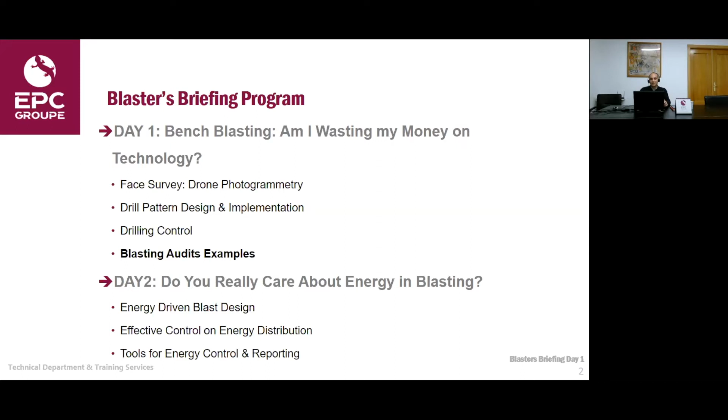So today we'll focus on the basis of good blasting, which is basically controlling the geometry of the face. We'll be having a look at the state of the art of face survey, of drilling control, and we'll be giving a couple of examples of audits that we have been doing in the last years that give a good example of cost savings, cost optimization by the only implementation of technology in bench blasting. Okay, so here we go.

All of you know that drilling and blasting is the first step in the production chain for mineral production, in quarry, in mining, and it has a big influence on what is happening afterwards. So a good quality in drilling and blasting is going to affect dramatically what is happening in charging, in hauling, and in crushing and milling.

If I would ask you to give me a list of problems that commonly appear when bench blasting, I think we will all get to something like this. We can have fly rocks, which are probably the most dangerous event that we can have in bench blasting. Misfires, toes left after the shot, unstable faces that we have to deal with after that, unsuitable muck pile, a muck pile that has not the right shape for our loading machine, so it's too tight, too rough to excavate.

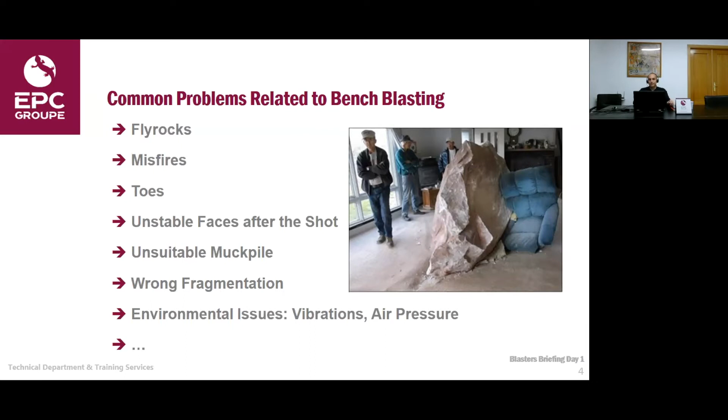The wrong fragmentation for our purpose, so it means usually too coarse, too big fragmentation, but sometimes too fine. And also environmental issues that can be a big problem for those mineral operations near populated areas. These environmental issues can force some mines or quarries even to close down, depending on their location. So big issues.

These technical problems have safety and economic consequences. All those problems will be translated into safety and environmental issues that we have seen, vibrations, etc. But they can also be translated into a reduced productivity in the plant in tons per hour, which means that the plant will not be running at a good speed of production. But it can also be translated into costs in energy for the crushing, costs in secondary breaking or secondary blasting for dealing with boulders and toes.

It has been proved many times that a wrong fragmentation, a too big fragmentation, will have influence in cost for charging and hauling. But we can also have other sorts of problems like mineral reserves loss. For instance, if we are producing too many fines in certain operations, those fines can be a big problem. We can be putting all that percentage of fines either as an undervalued product or as something that we have to put into the bin, that we have to discard.

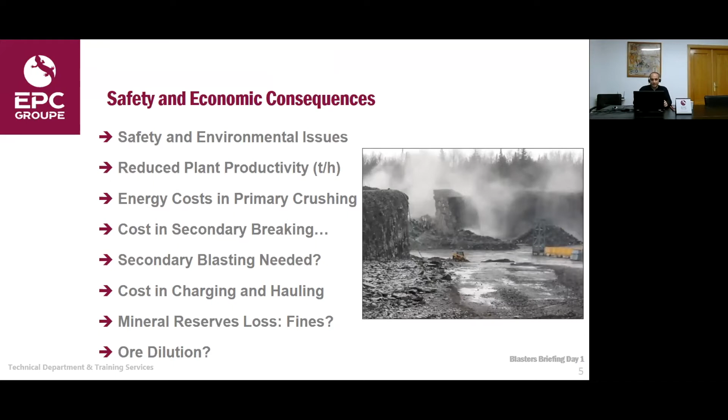Part of that is explained by the mine-to-mill concept, which says that by increasing your costs in drilling and blasting, which means by drilling more and using more explosives, basically by doing a better use of explosives, by fragmenting more the rock with the chemical energy of explosives, you will be able to reduce your costs downstream in loading, hauling and crushing, and somewhere we will find a minimum in the cost, and that's the minimum that we have to look for. I do agree with this graph, because the chemical energy of explosives is the cheapest by far.

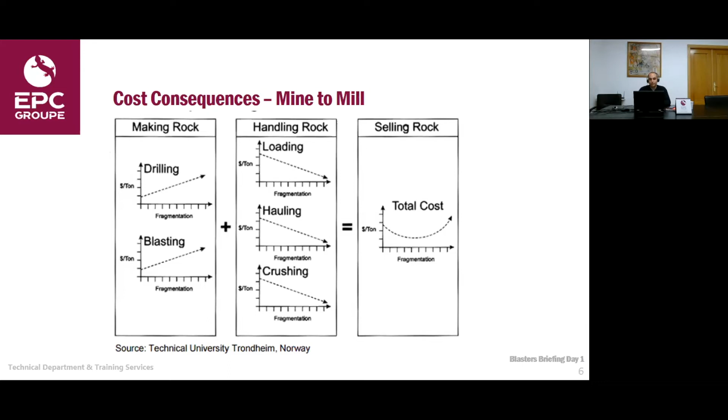However, we have to consider that sometimes we do not have to increase our costs in drilling and blasting to find that minimum. Sometimes we only have to do things better. Very often, by making use of technology, we get to a point where we can make a better use of our explosives, of our drilling. It's not necessarily that we have to spend more in drilling and blasting to get a better costing on our production, and that's what we are going to see today. So the EPC way, we are focused entirely on technology for drilling and blasting, both in underground and in open pit and quarrying.

So we go quickly to this cycle of technology use. We start with a drone survey. We use a drone for surveying the face, and from that, with photogrammetry, we get a 3D model of the face. We'll see that later on. Using that model, we can design an optimized drilling plan for our purpose, for the fragmentation and heave that we want on the muck pile. That design is transferred to a drill rig, usually fitted with a GPS system, so it will locate precisely on the collars. And very important, we need to control the deviation, as we'll see later.

Once we have the collar positions, the real trajectory or deviation of the boreholes, and the 3D model of the face, we are in a position to design the loading plan and the sequencing plan. We do that with our software, the Expertise 3D, same as for the drilling plan. We will produce a plan that, as we will see today and on the next webinar as well, will aim for an even distribution of energy within the rock mass. That plan is then uploaded to the field tablet, and this field tablet communicates via Wi-Fi with the MEMU, the mobile manufacturing unit, if we are going to be loading with a MEMU.

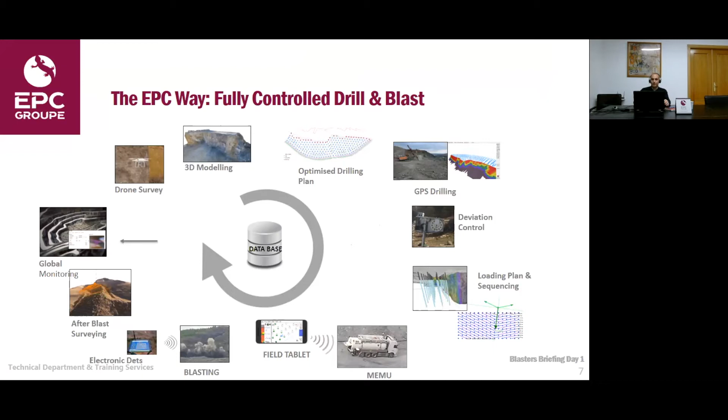Well, this is a short summary of what we can do and what we do. But today we're going to focus on the geometrical control of all of this cycle, which is the drone survey, drilling plan, drilling control, and what we can obtain from that. So let's start with it. The face geometry. This is the basis for everything. Knowing the precise geometry of the face is the keystone for any other job that we want to do with our blasting.

Traditionally, the bench has been considered as this, a linear model. Everything is straight, everything is parallel, perfect. And this sort of linear model has always been used for calculating the blast ratio, the amount of explosives, etc., and the amount of rock that we are going to blast. All that is like the Bible for our costing afterwards. However, as we'll see, this differs quite a lot from reality.

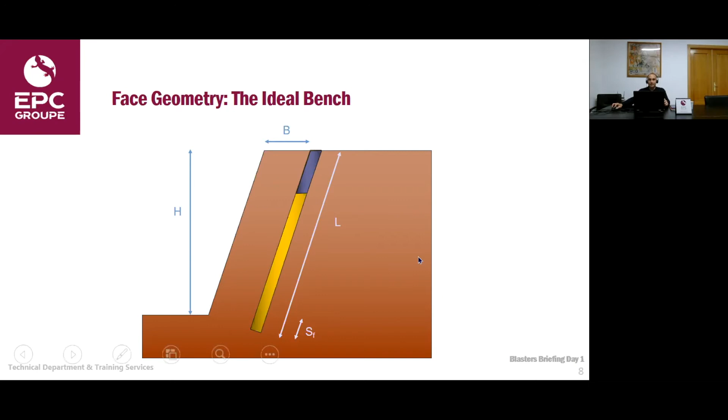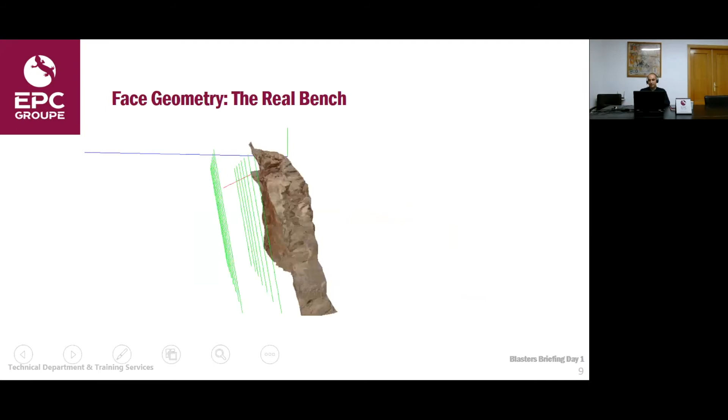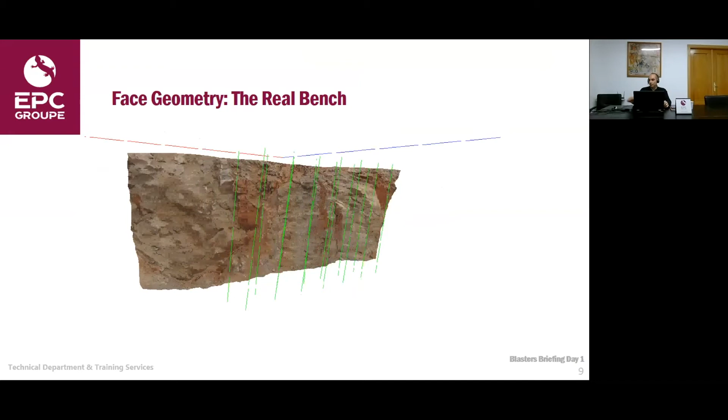The reality is more like this. This is a model obtained by photogrammetry of a bench and of a face to blast. And well, to be honest, it's not too bad. I have seen them much worse than this. But as you can see, nothing is linear there. You have plenty of irregularities on the face, which gives us an idea that reality is never close to the ideal.

What do people usually do to estimate things like bench height, shape of the face? Well, still many people use nothing. I mean, they just take a look at the face, and they say, well, I think my face is 15 meters high, or it's 12 meters high there and 13 there, etc. Sometimes they make use of a tape, or a stick together with a tape, to make some estimations of the bench height, of the burden at the bottom of the holes, etc.

But this is not good enough. It's very, very easy to get errors of more than 1 meter, if not 2, or even more, in the bench height or in the burdens. And that can lead, as we will see later, to cost increases and also to safety issues. So not good enough.

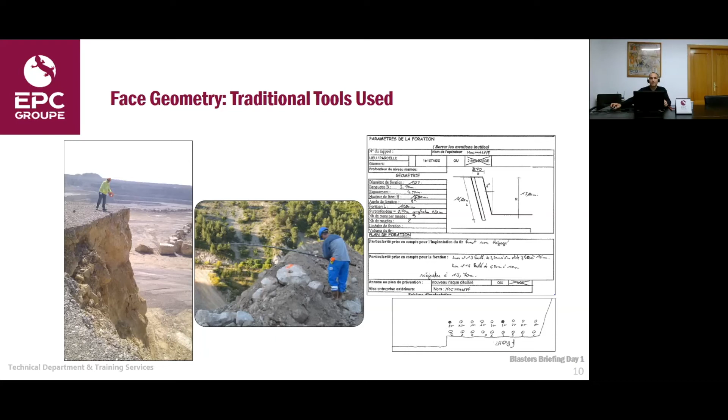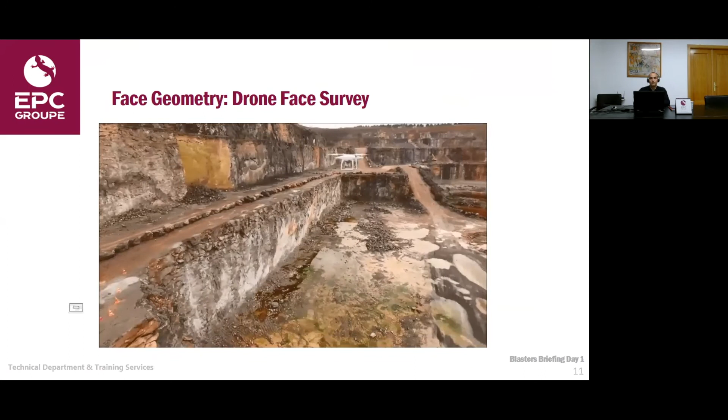What do we do now? What do we have? The state of the art now is this device. It's a drone. In the last 2 decades, we have had access to other devices, the lasers. First, we had the 2D laser, in 2 dimensions, that had to be operated manually. Not good enough in precision, but good enough to give us some idea of the burdens in front of every borehole. Then we had the 3D lasers that produced a decent model of the face, good enough to start doing designs. However, in the last 5 years or so, we have had access to these drones that produce a model by photogrammetry.

So they take pictures of the face, and they produce a drone survey from the photographs. Another advantage of this system is it's easy to use, very quick to deploy, and very safe to use as well, because they can be operated from anywhere. I mean, you have to have it in your vision range. But as you have seen before in the films, the pilot is in a very safe position, having a look at the pictures taken by the drone.

And on top of that, it's also very precise. You can see the guy there, that's the pilot, and it's very precise. As I was saying, we have been carrying out some tests on precision of these devices, and they are more precise than laser 3Ds. So very good, all advantages. And this is a tool that we use at EPC now for every survey.

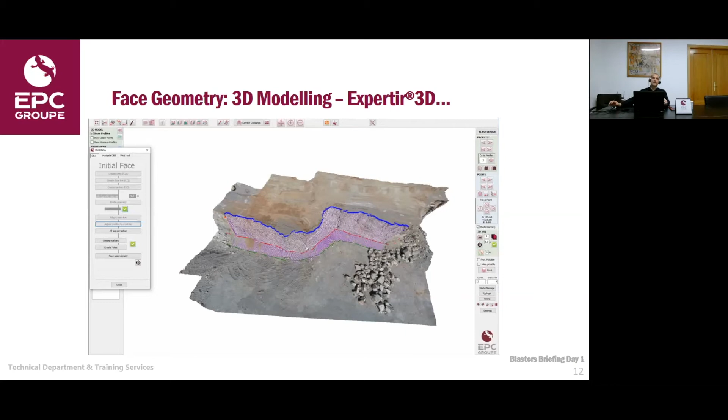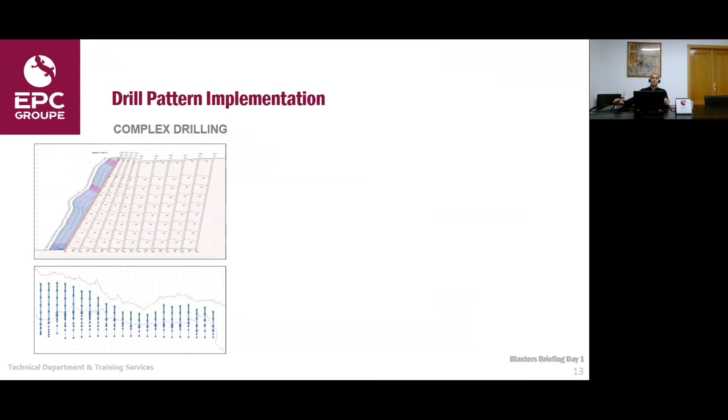So once we have that model, and with Expertir 3D again, we can start producing drilling patterns. Sometimes these patterns can be complex, especially when we are dealing with multiple rows and with inclined faces. What do we do here? Expertir 3D will give us the collar positions for a perfect drilling pattern. The right way to transfer those collar positions to the field will be to use a GPS device.

Either a manual GPS device, those poles that you can hold yourself, or even better, use drill rigs fitted with a GPS device in the mast. As you can see, that's one of our drill rigs in the UK, fitted with that device. That will ensure that the drill rig will be collaring in the right position all the time. So we have to drill that.

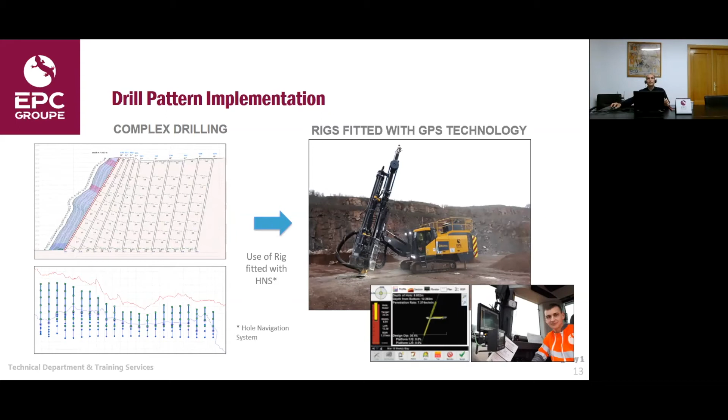That will take some time, and once it's drilled, very important, we need to control what we have drilled, because as you all may know, it's very common to have deviations, depending on ground conditions, on the type of machine that you are using, etc. It won't be unusual to have sometimes big deviations from the planned drilling. So marking and collaring errors should not be a problem if we are using a GPS device. Maybe we may have a few centimeters, because the drill rig cannot collar in the right position. Sometimes it has to move a little bit more, but very little.

However, depending on ground conditions and the machine, we can have deflection errors, what we usually call deviation. And also the mast might not be set properly. So we could have inclination errors in any direction, in azimuth or in inclination, or hole depth errors as well. So that's something we have to control, right?

As an example, you can see here on the right side of the slide a front view of a drill plan, and you can see how some boreholes tend to coincide, creating potentially a risk of fly rock at the bottom. But more than that, it is creating a potential of boulders and toes left in those boreholes that are separated by nearly 6 meters. So we may have problems here. So all that needs to be controlled before producing a right blasting plan.

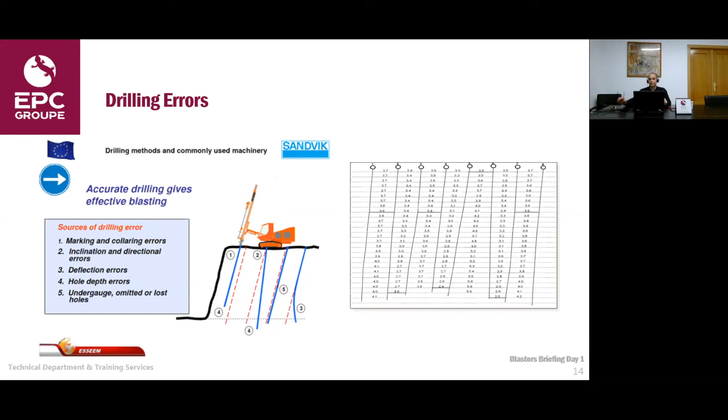How do we control this? Well, you may have seen this before. I'm sure you have. We do this by using an electronic probe. The one on the left is the one traditionally used, still being used. It's a pulsar probe that is put into the borehole, and every meter it takes the measure of the inclination of the borehole. So afterwards, it reproduces the real direction, the real trajectory of the hole.

However, we have been developing this for the last year. This is an automatic and user-friendly electronic probe by EPC that operates by itself and transfers the data automatically to the tablet in the operator's hand. So lighter, easier to operate, and quicker. Both give a very good result, and they are basic for obtaining a safe, productive design.

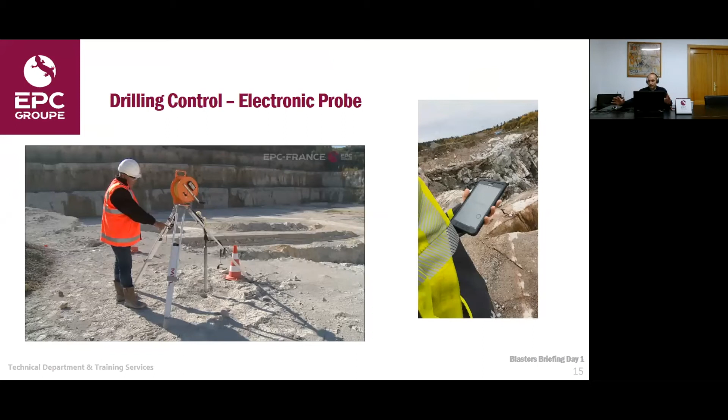So once we have all that, we can say that we have control on geometry. Otherwise, as I like to say, if we do not control geometry, we will always have uncontrolled blasting. No geometry control means uncontrolled blasting all the time.

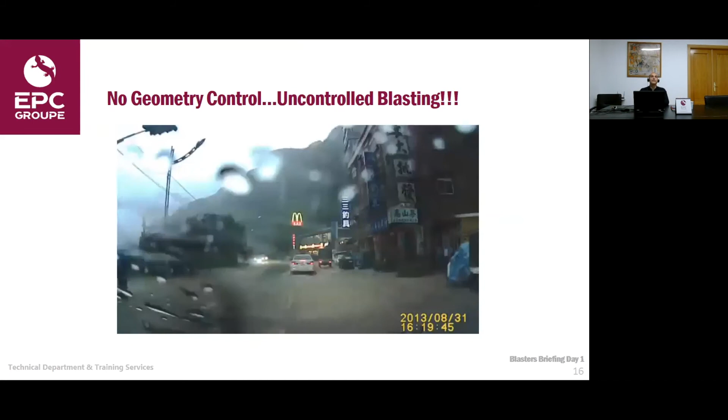The most dangerous issue we can have is fly rock. You will see here a tremendous real example of fly rock.

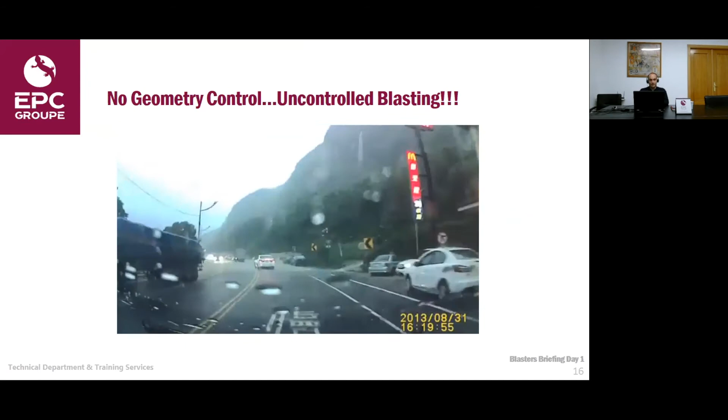Just a dramatic example of how things can go wrong.

Anyway, we won't be having this because hopefully we will be using technology for controlling our geometry, and on top of that, we will be stopping traffic when blasting near a road. So anyway, let's move on.

We are going to present now two examples of use of geometry, of use of technology in real cases, and how this use of geometry led to savings in our customer sites.

The first one is in an open pit mine. Our technical services went there and did an audit on the drilling and the design, basically the geometry of the faces to blast, and they found this.

They found that the boreholes near the free face were having to deal with burdens in excess of 10 meters very, very often - 10, 11, 12 meters. The others in the back rows were dealing with burdens more logical for the drilling diameter - 3.5, 4 meters.

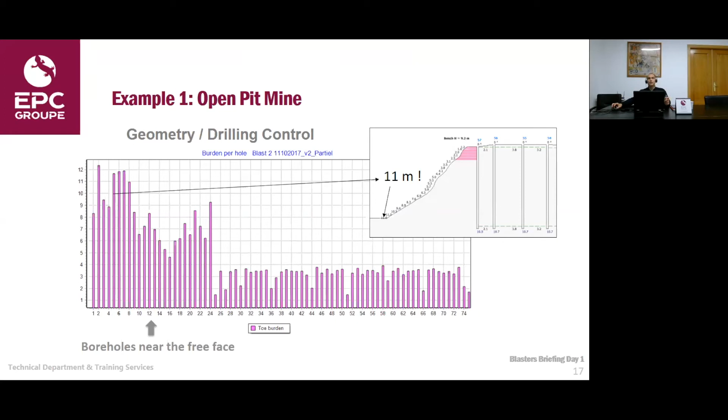However, what does this mean? Basically, it means this, as you can see - this is the blast filmed after that was the design, and this is the blast film.

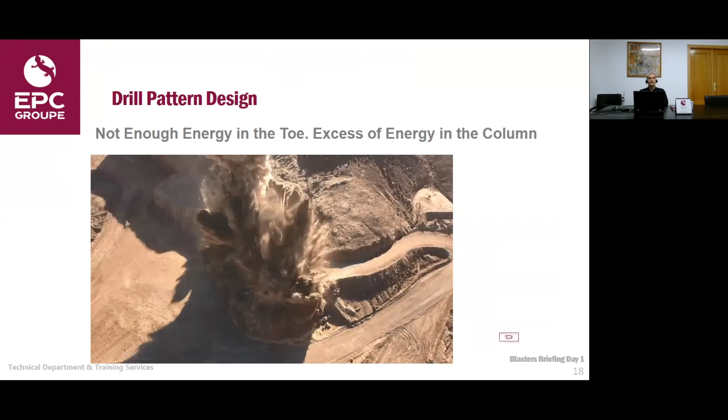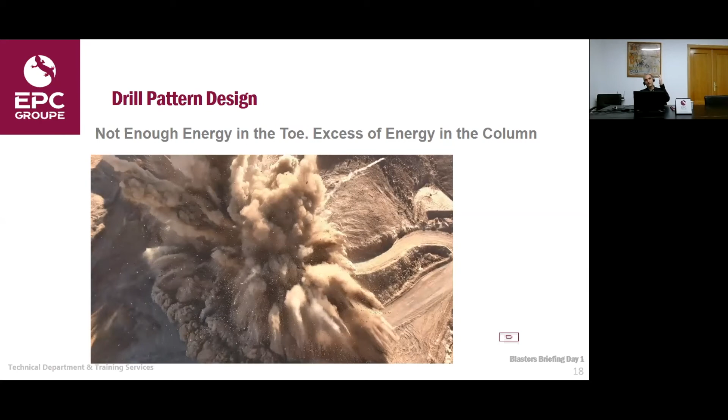The explosives always tend to work towards the easiest possible way. In this case, the easiest possible way for the front row is upwards, because they have to deal with 11 meters or more. So we're having fly rocks upwards, and as we will see later...

The problems mentioned before - boulders, toes left after the blast, etc. - economically means that we have to spend time, money, energy, fuel, and people in secondary breaking, in secondary blasting sometimes. So it's not good. All this can be resolved by doing things properly from the start.

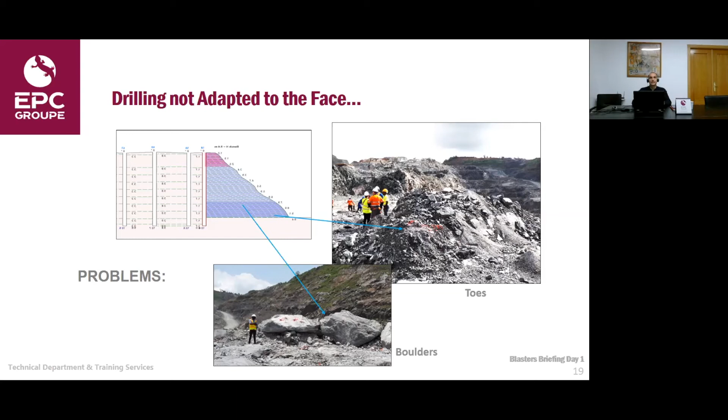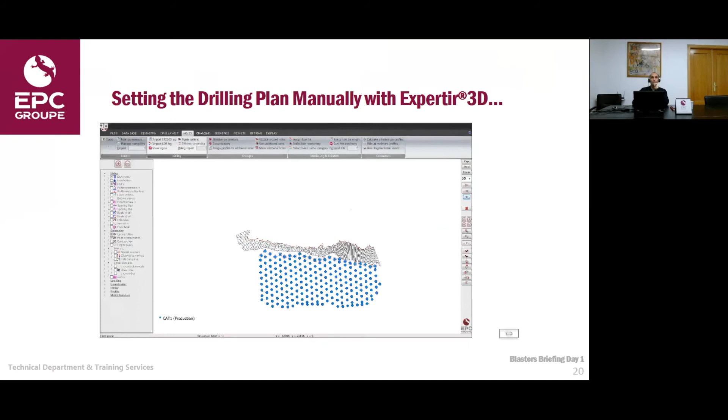So what do we do? Basically, we are going to adapt the drilling plan. Just as you saw before, all the boreholes were vertical, and that first vertical drilling - we always recommend to incline boreholes for a better work in the toe.

But anyway, when you have a face like that, so inclined, you need to adapt your front row, your rows behind as well, and that's what we are doing here. That can be done manually with Expertir here, but it takes time. Imagine that you have to deal with 300 or 400 boreholes, which is not uncommon in mining - it can take some time.

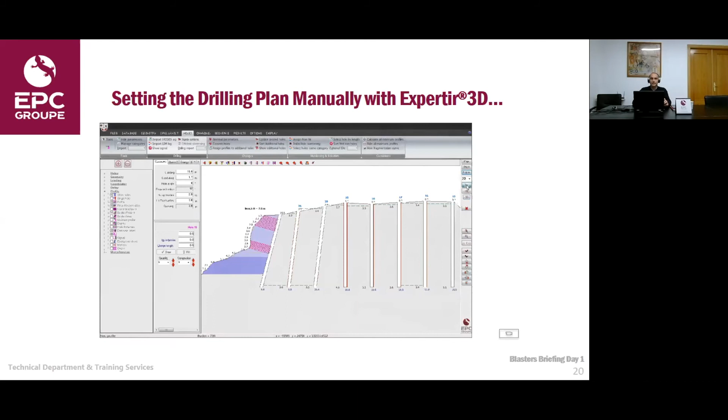So what do we do? Well, we have algorithms included in Expertir 3D. So the software can calculate for you automatically the drilling plan once you give it the basic data - the depth, inclination, the burden, spacing, and so on.

That will produce automatically a blast drilling pattern. Then you will have to probably make some corrections manually because algorithms are smart, but they are not perfect. But anyway, that saves a lot of time, and it will produce a drilling pattern according to what we want. You may have to do some corrections, but very little compared to what we were doing before.

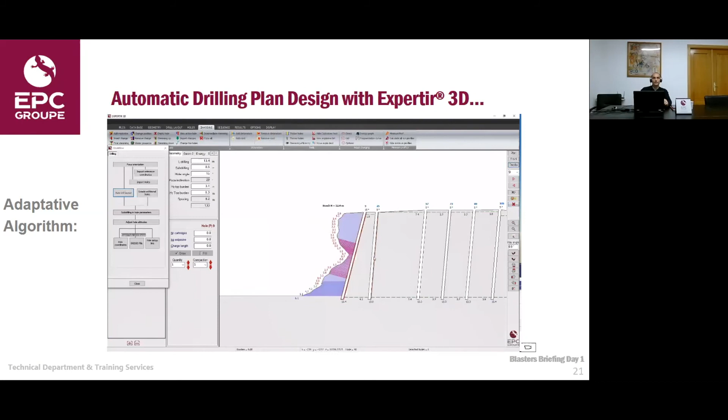So let's move on. So that was the starting point, the standard pattern, and as you can see, many boreholes were having to deal with burdens of more than 11 meters.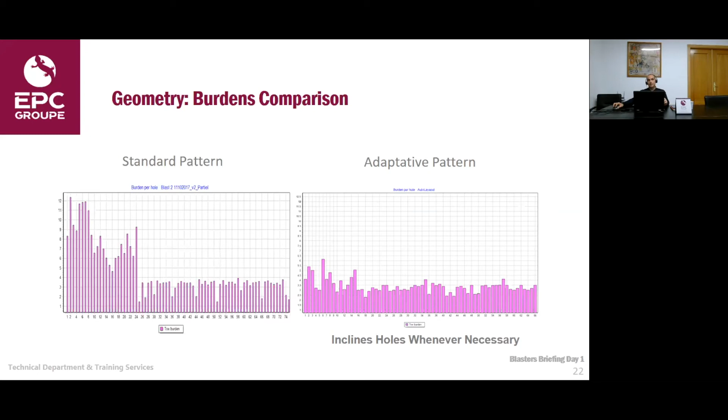Now we are able to produce patterns much more logical, and this means a more even distribution of energy within the rock mass that we are going to blast. When we produce designs that aim for this, that look for this, that are searching for a more even distribution of energy, we get results like that.

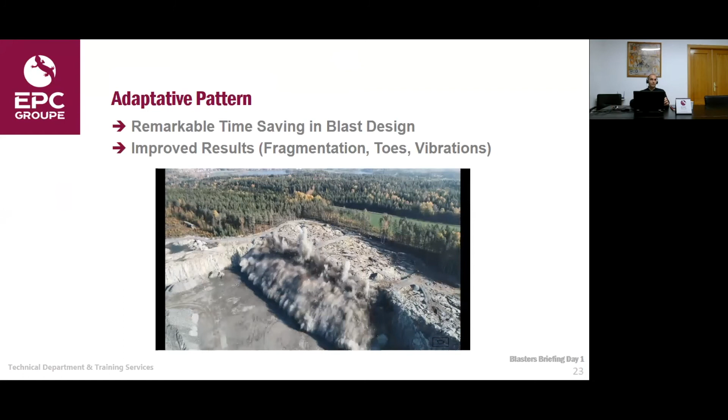We not only save time by using the algorithm in the Expertir 3D, but more importantly, we get improved results in terms of safety, but also in production parameters, like fragmentation, toes, vibrations, etc. So as you can imagine, having those results has nothing to do with having big boulders and

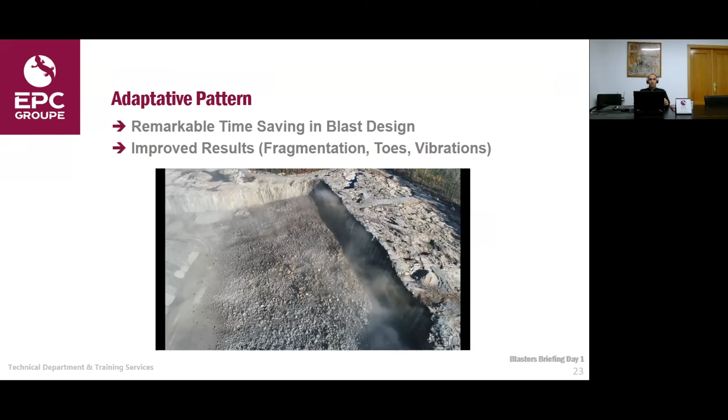toes left after the shot, etc. Well, that was the first example. We're going to move to the second one, which is in quarrying. That audit took place in a group of quarries in Europe, and basically they were not using technology. They were estimating the volumes blasted using the famous linear model.

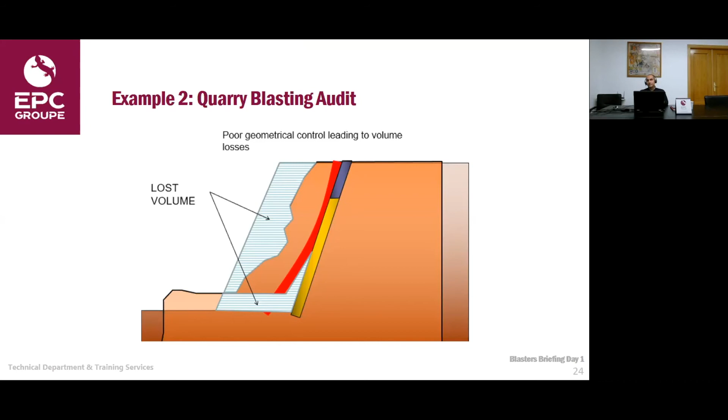And as we will see here in this graph, we audited 8 quarries, and 5 out of 8 were overestimating the volumes by an average of 20%, which means that they were using explosives and drilling for blasting 20% more than what they were really blasting. So this very simple, it means that they were increasing their costs by 20%, as simple as that.

What does it mean? Well, it means that the sole implementation of technology, of knowing precisely the shape of your face and the exact position of your holes, in this case, saved 20% of costs like that. In one go.

I could say easily that, because I have some experience now in visiting quarries in different places. Wherever I go, this problem is pretty common. So I won't be very surprised to see something like that in many other quarries elsewhere. These things happen very often.

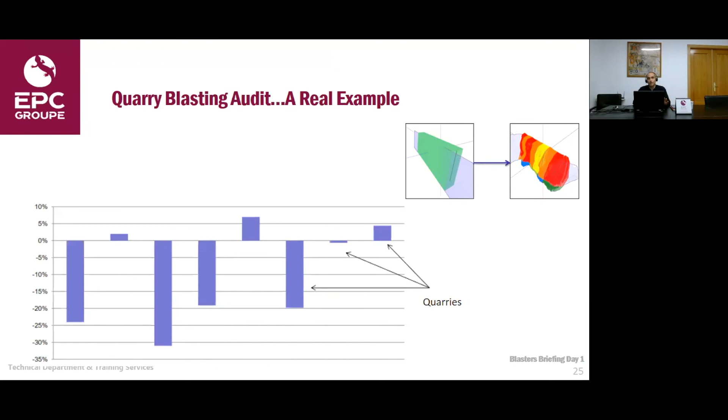You can see out of these 8 quarries, there were 3 quarries that were having the opposite problem. They were underestimating the volume. So someone could say, well, good for them, they were blasting more volumes with the same explosives, with the same drilling. Well, as we have seen before, and the experience in this audit said so,

all 8 quarries were having problems with wrong fragmentation of boulders or production, etc. So in any case, having excessive burdens is going to lead all the time to poor fragmentation, toes, etc., and excessive vibrations as well. So it is not the right economics to play, it's a wrong economy. So as a summary, the explosives and the drilling must be placed in the right position every time, at the right burden to the front, to the free face.

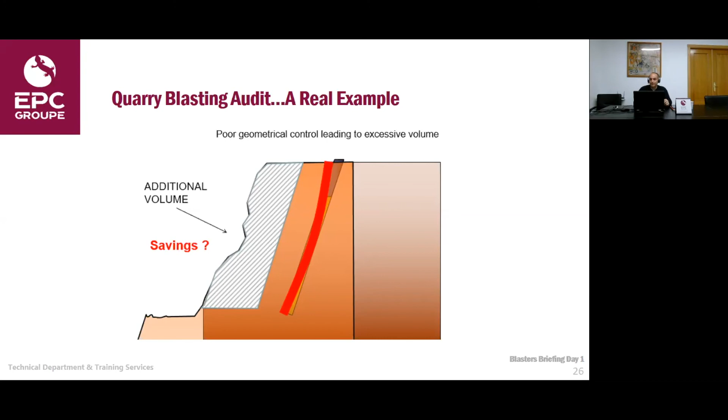Part of this misuse of explosives took place in the subdrill, and this is a pretty common error that I see everywhere I go. When technology is not in place, it's very common to overestimate the bench height, hence to subdrill more than necessary. In this case, the average was about 2 meters of subdrill, if usually you subdrill 1 meter or so approximately.

So this means that they were subdrilling 2 meters in excess, hole per hole, blast per blast, which means a lot of money, not only on drilling, but also spent on explosives. And when you are not loading with bulk, but you are loading with cartridges, it means that you are putting your most expensive explosives in the bottom of the hole for doing nothing, just for creating vibrations, which is, in my point of view, a big waste of money.

In this case, we estimated that this represented a 15% increase in the drill and blast costs alone. The rest was related to the shape of the face that was not as straight as they thought, etc. So this is another example of how the implementation of technology in your quarry or mine can lead immediately to cost savings. You will be able to place your explosives in the right place, and you will be able to use the right amount of explosives, no more, no less.

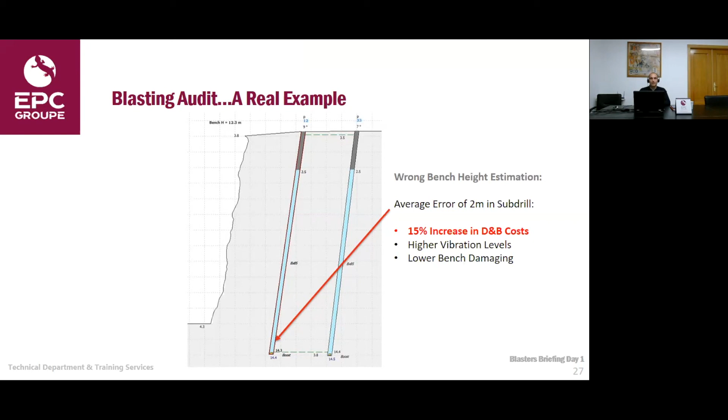It's a transition thing. I mean, things don't change from one day to the next, but by making extensive use of technology, shot after shot, they managed to reduce that amount of toe holes to almost zero in the year 2012. I would like to see the figures of today, of 2020, but I guess it will be none.

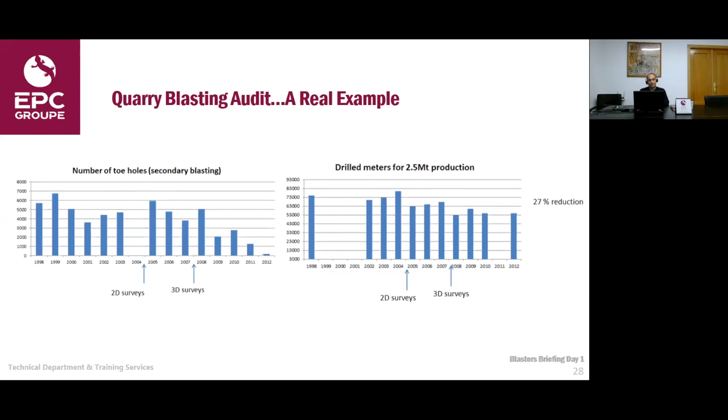Not bad, and again, this is without doing any further improvement in blasting. This is just by saying, let's put the explosives in the right place.

So the question was, am I wasting my money on technology? Well, I would say no, in block capital letters, no. Because the precise knowledge of geometry allows you to optimize your drilling and explosives, as we have seen in these two examples. It also allows you to make less use of secondary blasting and breaking.

More importantly, that leads you, or allows you, to reproduce successful designs. Once you can control your geometry, you can reproduce designs that give you what you want in terms of fragmentation, heave, or whatever. That can lead to nice optimization projects, technical projects like fines reduction.

Can I reduce my percentage of fines after blasting? Probably yes, but you can only do that by knowing precisely where your face is and where your explosives are loaded. Fragmentation control - can I make it finer, can I make it coarser? I'm sure you can, but again, geometry must be there. You must control your geometry.

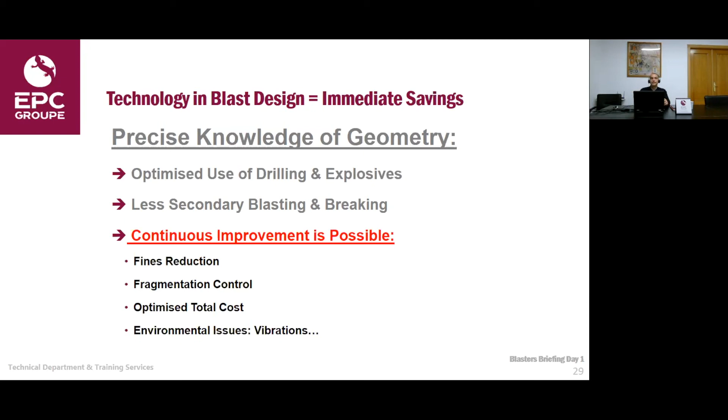So yes, technology in blast design leads to energy control. Of course, the precise knowledge of geometry is the basis for any controlled blast, for any good blast design, any design that aims for safety and productivity. It's a keystone for the even distribution of energy in the rock mass.

This leads us to the next question we're going to ask in the next webinar, which will take place in January 2021: do you really care about the explosive energy when designing a shot? That's one question we will answer in about one month, or six weeks time. So that was my presentation. I hope you enjoyed it, and we are open to any questions you may have. I give the word to my colleague, Eric Krolop.